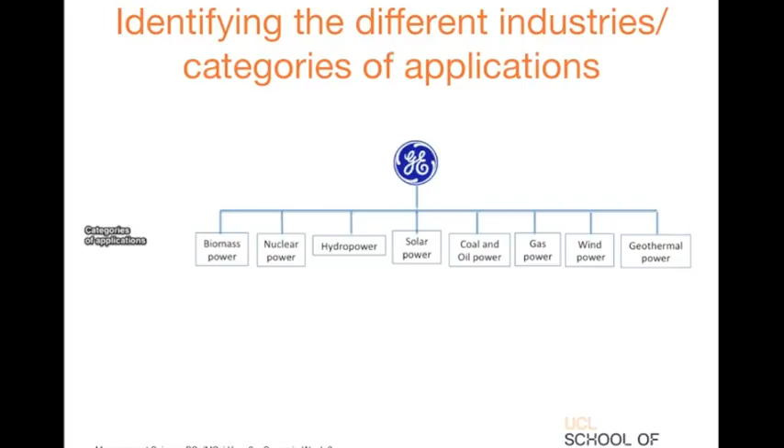We decided to focus on coal power for multiple reasons. First of all, according to Forbes, coal is the fastest growing source of energy and it will overtake oil as the world's largest energy source by 2025. We also chose coal as it is widely used in Asia and more particularly China, the country we will be focusing on. Indeed, there are more coal power plants installed in China than there are in the US, the UK, and India combined.

Finally, according to the Journal of Environmental Protection, 36.4% of the PM2.5 particles in Beijing come from coal combustion, and in suburban Beijing, coal combustion contributes to 48.6% of the PM2.5 particles. Therefore, a large part of the particulate emissions around Beijing, in China, are due to the coal combustion within coal-fired power plants.

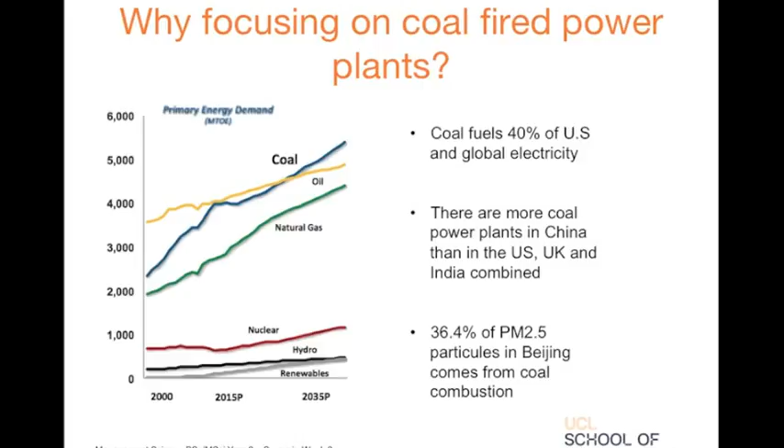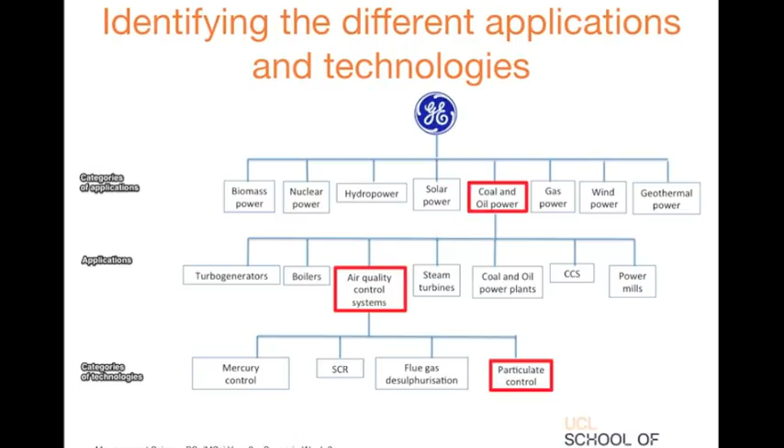Within the coal industry, different applications are possible. However, we focus our attention on the air quality control systems, AQCS, as they directly impact the particulate emissions from coal combustion, but also because it seems to be a very promising area in this industry. Indeed, we looked at the patents in the AQCS area and found that Alstom, a company recently bought by GE, has a significant number of patents, which shows that they have very strong R&D activities related to the AQCS area. Indeed, we know, for instance, that Alstom has one of the largest AQCS laboratory centers worldwide, located in Sweden.

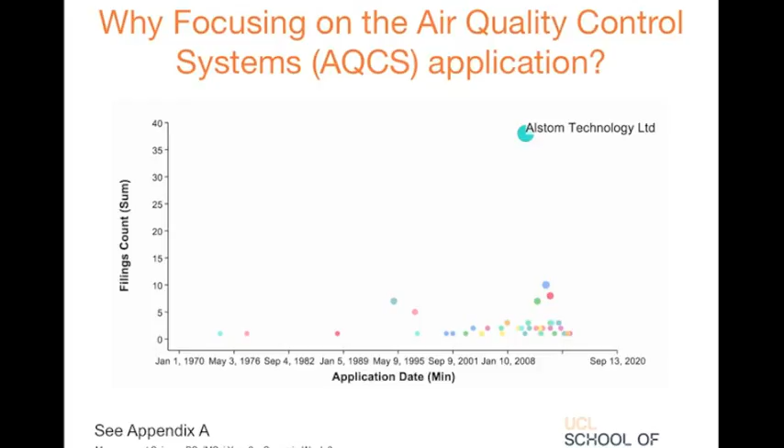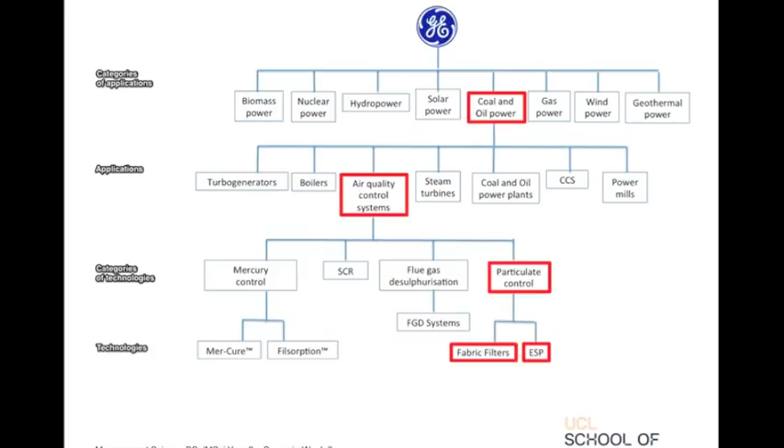Finally, we identified the technologies and sub-technologies within the AQCS application. We will mainly focus on two particulate control sub-technologies: fabric filters, FF, and electrostatic precipitators, ESP. These technologies are therefore the most relevant when dealing with coal power plants in order to reduce Asian air pollution. We can see on this image of a coal-fired power plant all the technology solutions provided by Alstom.

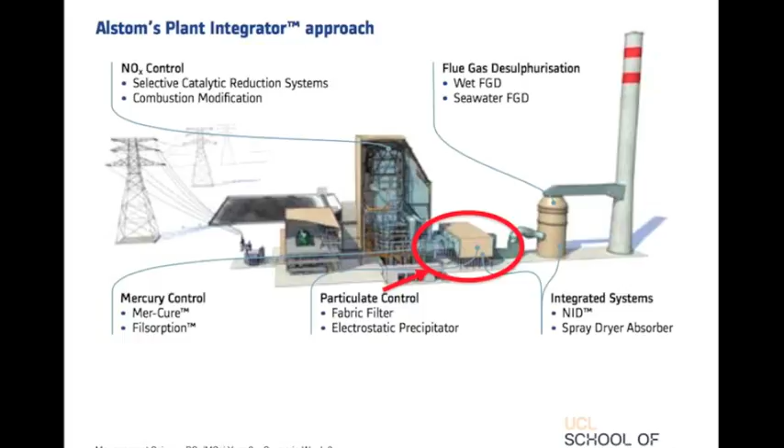We will be focusing on the FF and ESP technologies, which affect the red circled part of the coal-fired power plant. From now on in the presentation, we will explore what the fabric filters and ESP technologies are, how some of their performance characteristics are changing over time, and how these have a limited future in relation to achieving our goal.

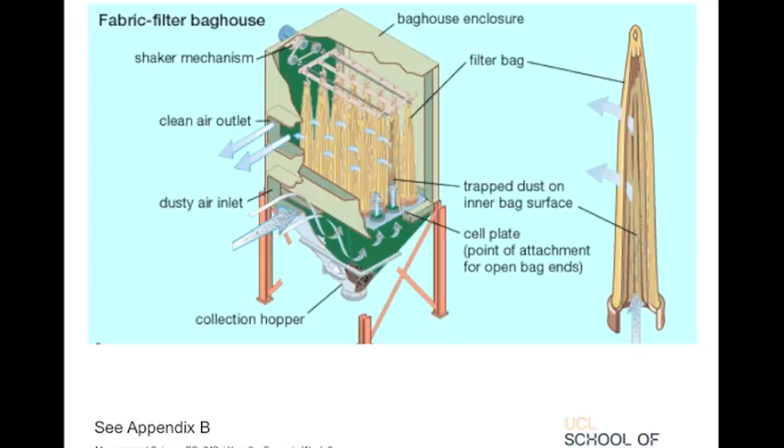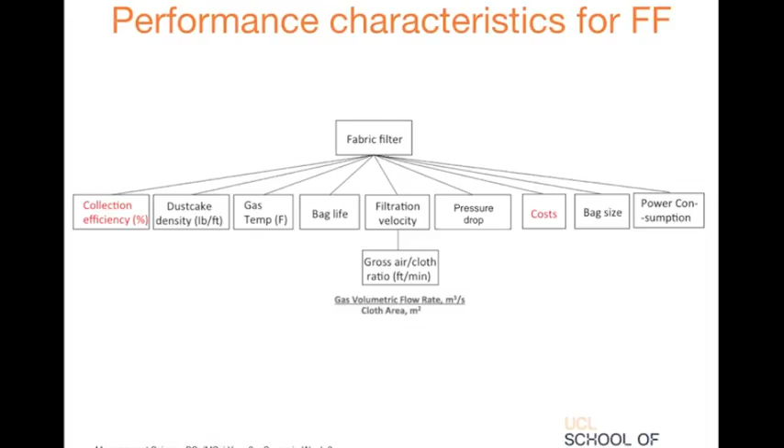First, let's go into the details of fabric filters. A fabric filter is an air pollution control device that removes particulate matter out of the gas flow released from combustion for electricity generation. First, we looked deeper into the technology and found out a range of performance characteristics. The key characteristics to analyze are the collection efficiency and the costs. In fact, fabric filters are regarded as being highly efficient thanks to the capacity to collect particles whose size is below 2.5 micron. However, the technology requires high operational and maintenance costs.

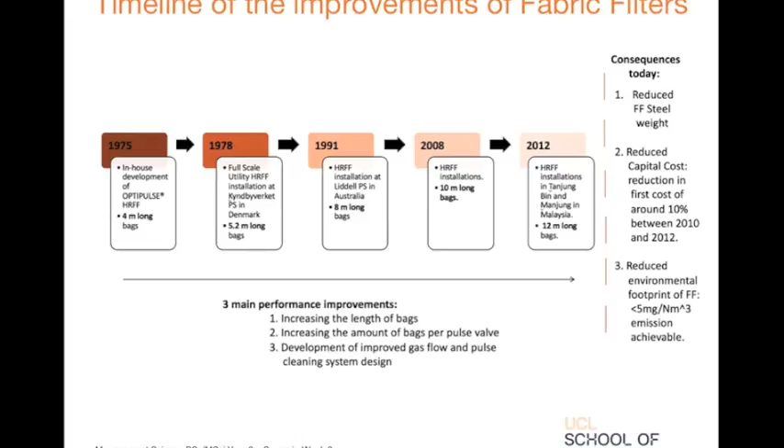In parallel, we looked at how fabric filters improved over time. As can be observed on the timeline, there are three main improvements over time: increasing the length of bags, increasing the amount of bags per pulse valve, and finally, developing improved gas flow and pulse cleaning system design. Such improvements enable a reduction in steel weight, capital costs, and environmental footprint. However, the technology is also facing limits today. The main challenge observed with fabric filters is high operation and maintenance costs.

Finally, we tried to estimate how the technology will improve in the future. Assuming that the improvements remain similar to the past improvements, the size of the bags would increase to 20 meters, whilst the number of bags per pulse valve would continue to increase too. Such improvements would lead to higher costs. For instance, bag replacement is required every 3 years. The more bags there are, the more expensive the maintenance costs are. Therefore, there will be a point in time, estimated to 2025 here, where the FF technology will reach a breakpoint. The technology will become too costly to be maintained and therefore to be used.

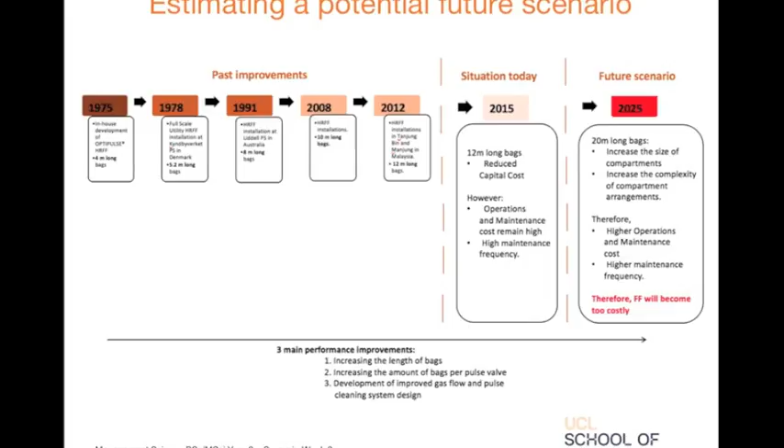Here, you can observe the performance characteristics of ESPs. Following the same logic analysis as for fabric filters, we looked more in depth into collection efficiency and costs. Indeed, ESP is regarded as being a technology cheaper than fabric filters. However, it deals with a lower collection efficiency.

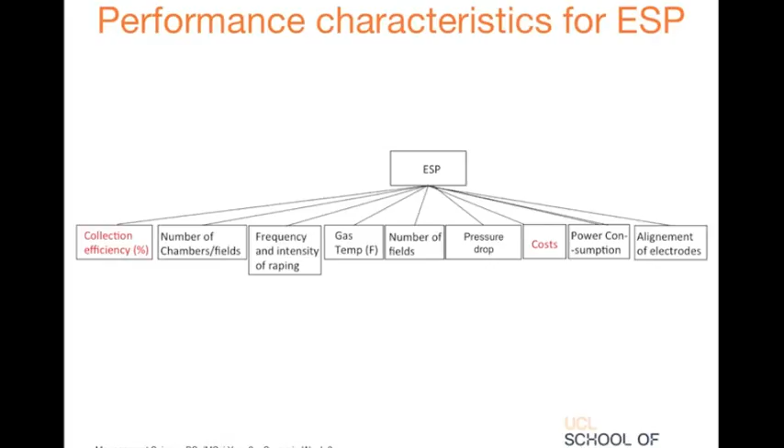Indeed, the main challenge observed with electrostatic precipitators today is to increase collection efficiency. This is mainly due to the fact that ESP collection efficiency is highly dependent on two things. First, it is dependent on the type of fly ash, which depends on particulate size, composition, and resistivity. Then, the ESP collection efficiency is dependent on flue gas properties depending on the gas's temperature and composition.

Consequently, these factors make the dust emission hard to be reduced to the current regulations, which are less than 50 milligrams per normal cubic meter. Previously, the addition of flue gas conditioning systems, as well as the improvement of plant management systems, controllers, and distribution screens, enabled the technology to lower its costs. However, the ESPs are still not as efficient in collecting particles in the range of 0.1 to 1 micrometer, which are the main cause of health issues.

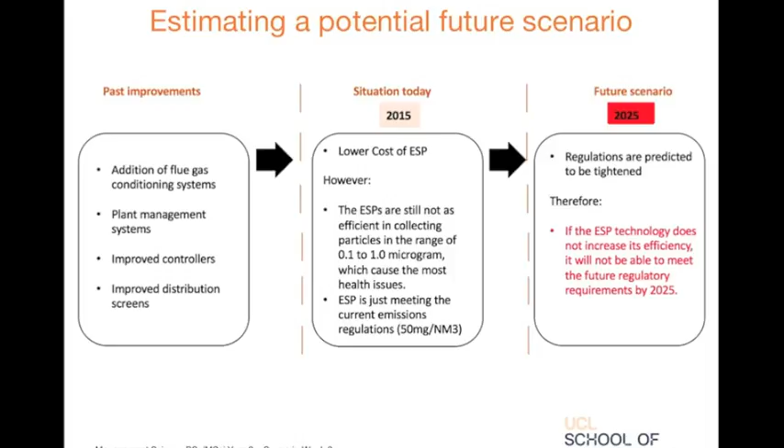Hence, ESP is only just able to meet the current emission regulations, which are less than 50 milligrams per normal cubic meter. In addition, as regulations are predicted to be tightened, ESP technology will struggle to increase its collection efficiency. Therefore, if the ESP technology does not increase its efficiency, it will not be able to meet the future regulatory requirements by 2025.

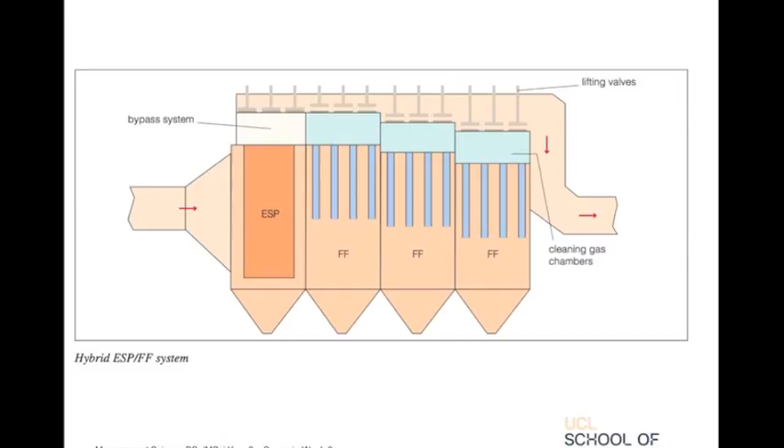As FF and ESP technologies have a limited future in relation to achieving our goal, we also looked into an alternative technology which is more recent, the electrostatic fabric hybrid particulate collector, EFPC. It is a combination of ESP and FF. We will call this technology the ESP-FF hybrid system in our presentation. The solution involves using ESP sections as the dust precipitator and installing fabric filters in the remaining ESP housing, forming a compact hybrid particulate collector. This new hybrid ESP-FF system aims to become more viable than the individual technology by using the advantages of both technologies.

On this table, we compare three common performance characteristics of FF, ESP, and hybrid: capital costs, operational and maintenance costs, and collection efficiency. Hybrid has lower capital costs than ESP, but can't beat FF. It also has lower operating and maintenance costs than FF, but can't beat ESP. The collection efficiency of hybrid is higher than only FF and ESP. So overall, hybrid systems have average costs compared to FF and ESP, but its collection efficiency is higher. It therefore seems like hybrid systems is a technology that will be widely used and enable us to reach our goal in the future.

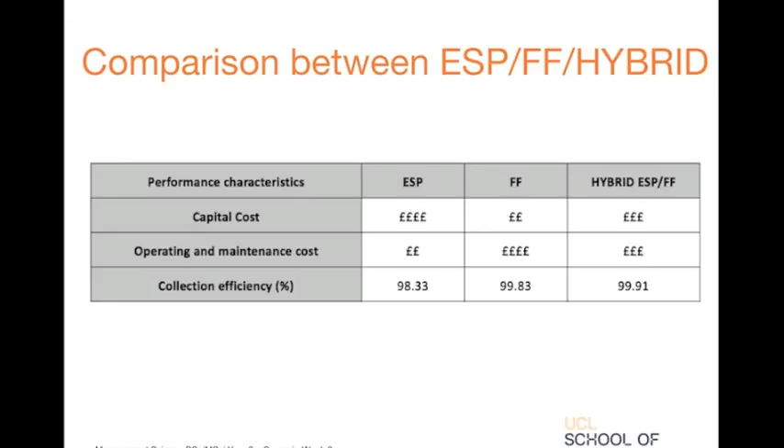However, hybrid technology currently has a performance gap. When the FF section is installed into the ESP to form a hybrid particulate collector, the gas flow distribution in the system becomes non-uniform. This negatively affects the collection efficiency of ESP because it is directly related to the uniformity of the flow distribution. If further R&D is devoted to ensuring uniform flow distribution, near zero emissions from the thermal power plants would be possible.

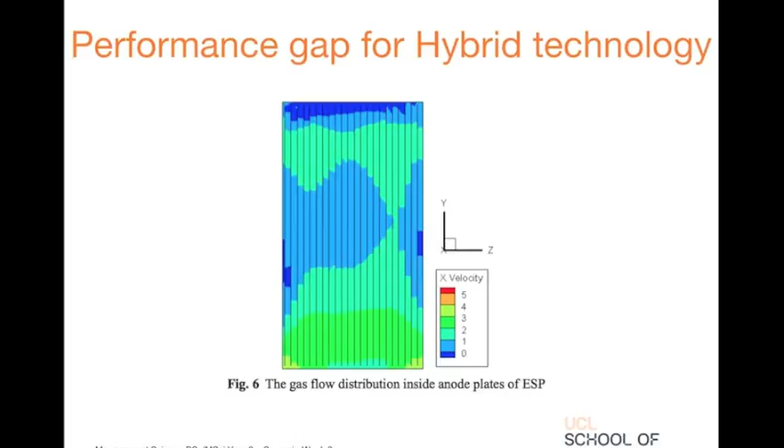Now, let's look at the future of regulations in Asia, specifically China, so that we realistically see the possible impact of hybrid technologies. China has taken important steps towards reducing emissions from thermal power plants, and we expect the standards to tighten further from the current standard of 20 milligrams per cubic meter to 10 by 2020 and to just 5 by 2030. The current FF technology is able to guarantee under 5 milligrams per cubic meter emissions and thus may meet the future predicted standards. But hybrid technology is able to reach 99.91% collection efficiency, which is higher than the collection efficiency of any removal technology used alone.